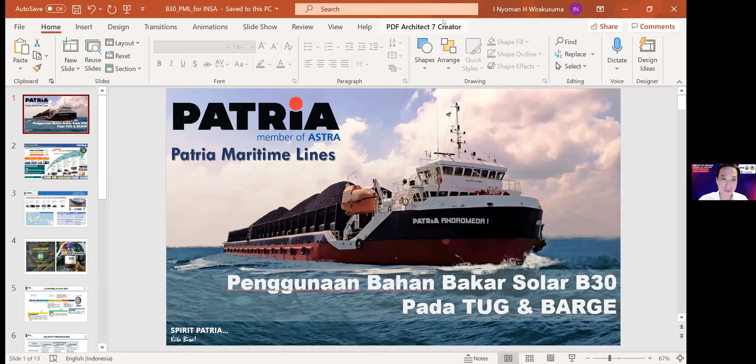Sebentar Pak, aku belum mau next ya. Pak Ronald, Pak Roland. Yes, Pak. Sepertinya nge-jam nih, nggak bisa masuk nih, nggak bisa next. Bisa next ya. Oke. Ya. Mungkin tuh slide show-nya Pak, ditekan slide show mungkin Pak. Iya. Saya sudah tekan slide show-nya ini, tapi nggak mau juga nih. Oh gitu. Oke, coba dari saya ya. Ini ada materinya Pak. Ini. Pak Roland ada kan? Ada Pak. Ada. Wah, nggak mau sama sekali nih. Saya stop sharing dulu ya. Oke, boleh Pak. Mohon maaf, Bapak-Bapak. Menandakan kalau materi Pak Nyoman ini padat banget Pak. Sampai ngehang ini. Oke.

Sekilas sebelum masuk ke presentasi inti, saya memperkenalkan diri di perusahaan kami bahwa Patria Maritime Line itu ada di bawah naungan PT United Tractors Pandu Engineering dengan brand Patria. Kita ada anak perusahaan PT United Tractors di bawah naungan Astra. Patria, PT United Tractors Pandu Engineering itu mempunyai 4 anak perusahaan: Patria Maritime Line, kemudian Patria Maritime Industri itu docking ada di Banjarmasin, Patria Maritime Perkasa itu shipyard ada di Batam, dan juga ada sedikit perusahaan yang agak melenceng, ikan ya, Patria Perikanan Lestari Indonesia.

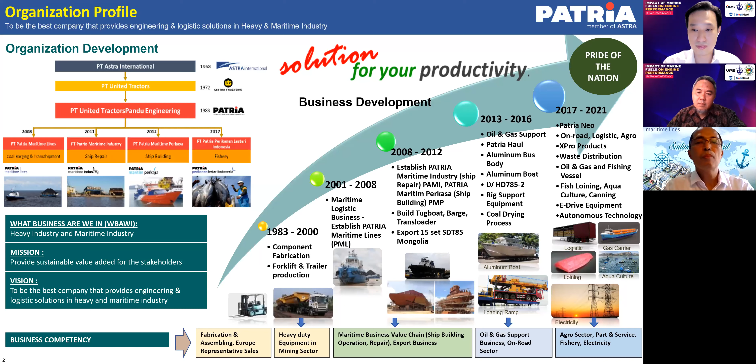Untuk Patria Maritime Line sendiri, kita termasuk perusahaan yang baru, baru berdiri tahun 2008. Kemudian kita mostly di Tug and Barge. Kita coba juga mengoperasikan invest floating crane, kita punya 1 set, dan juga Tug and Barge, SPB ada 1 set. Jadi kalau engine-nya kita menggunakan Yanmar, baik itu 300 feet maupun 320 feet, dan mostly ini beroperasi di Kalimantan Selatan, khususnya di Sungai Barito, dan ada mungkin ya begitu banyak ke Inter Island. Jadi kita kebanyakan di sungai untuk mengangkut batu bara dari Kalimantan Tengah menuju ke Tabunio. Next.

Oke, kita mulai masuk ke pemakaian bahan bakar B30 di Tug and Barge kami. Lanjut.

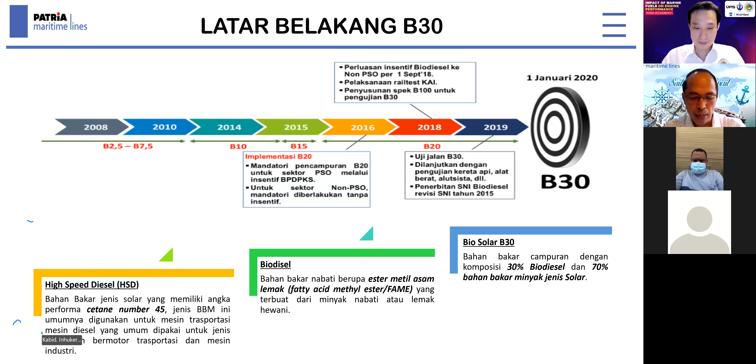Sebelum kita mulai, kita coba lihat dulu latar belakang pemakaian B30, di mana dari tahun 2008 ada Permen ESDM Nomor 32 tahun 2008, itu mulai penggunaan biodiesel dengan campuran 2,5 sampai 7,5%, itu 2008 sampai 2010. Kemudian di 2014 naik ke 10%, kemudian 2015 permennya diganti dengan Permen Nomor 12 tahun 2015, sama tentang pemanfaatan dan tata niaga bahan bakar nabati, di mana persentase daripada FAME dari CPO ditingkatkan dari 15% ke 20% dan akan lanjut sampai ke 30% mulai tahun 2020. Next.

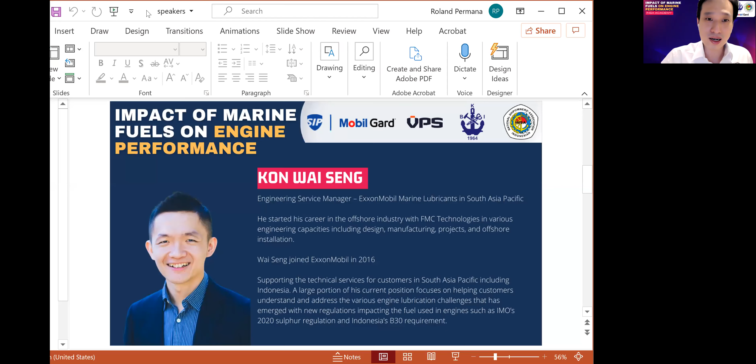Okay, Mr. Wai Seng, are you ready? Yep. Let me share my screen. Okay. Can you see my screen? Yeah, it's clear.

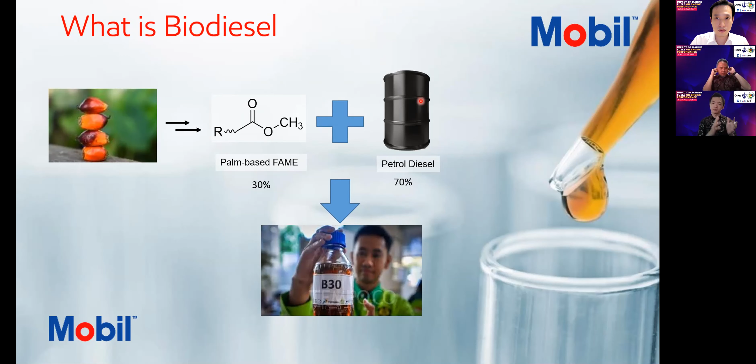But there are challenges when you're using biodiesel, because when it is exposed to things like air, water, and heat, the FAME content, fatty acid methyl ester, breaks down to form acids, ketones, and other components. This leads to a lot of the issues the earlier presenters talked about as well: storage stability, corrosion, sludge, filter plugging, and so on. So now let me talk about some of the other issues that can come from this.

Now, fuel dilution is caused by excess unburned fuel mixing with the engine oil in the crankcase. Fuel dilution cannot be avoided. In every engine, there's going to be some amount of fuel dilution because it's not possible to have a perfect seal. So even if you're using pure diesel fuel, you will have some fuel dilution. Now the key is you want to minimize having too much fuel in the engine oil, because it's not good, as we all know.

Here you can see a list of all the possible issues if you're diluting your engine oil. You have reduction in viscosity. You will also dilute away the additives in your oil. So let's say in my oil I have 100 of this additive. If I put 1% fuel, 2% fuel, I will dilute away this additive, and it will progressively become less and less. So my engine oil can no longer do the job it was meant to do because it is diluted away.

Then the FAME content also causes increased oxidation in the lubricant, and because of the viscosity differences, it also washes away the lubricant film between the liner and the piston. So when you combine all this, it actually increases the wear in the engine. If you look on the right side over here, excessive fuel dilution can be caused by a few things. For example, if your fuel injector is not working properly, you end up with very poor combustion, and the fuel will just flow into the crankcase.

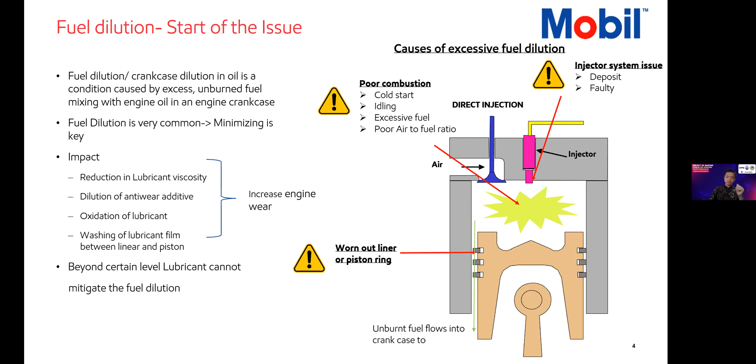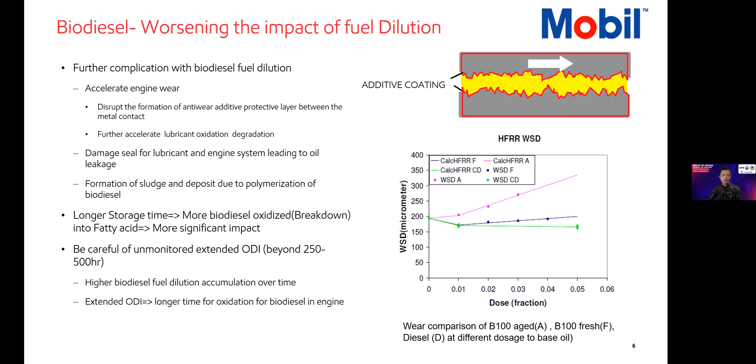Okay. So now let me move on. So some of the symptoms of B30 use: you can check, is your engine having any smoke? The smoke means there's some incomplete combustion. You can check the oil viscosity in your crankcase. If the viscosity is going down, that means it's being diluted by some kind of fuel. Accelerated oil degradation: this one, you really need a used oil analysis to pick up whether there's any oxidation happening.

Formation of deposits: this one is really down to inspecting your engine during the overhaul to see if there's any additional buildup of deposits, or whether you need to change out your injectors, or some other maintenance steps you need to do. Increased corrosion and wear: this one you can partly pick up during inspection or through used oil analysis, whether the iron levels are picking up, or anything like that. Okay.

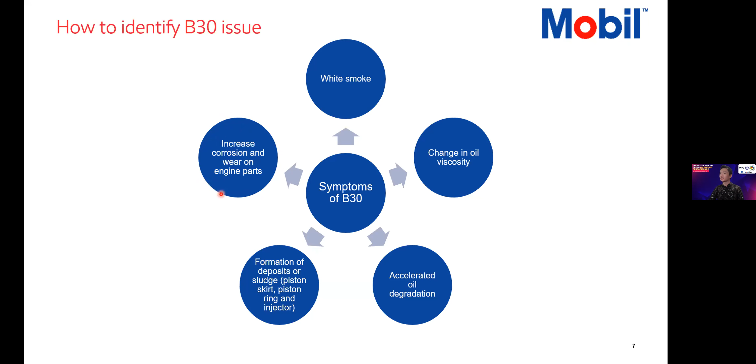Next one is avoid exposing your biodiesel to significant oxidation. As best as possible, keep the fuel and the oil sump sealed, and avoid exposure to light. And do not store the biodiesel blend for too long. I think the earlier presenters also said not longer than 3 months, and I think that's a good guide, because the biodiesel can retain water and can lead to microbial growth.

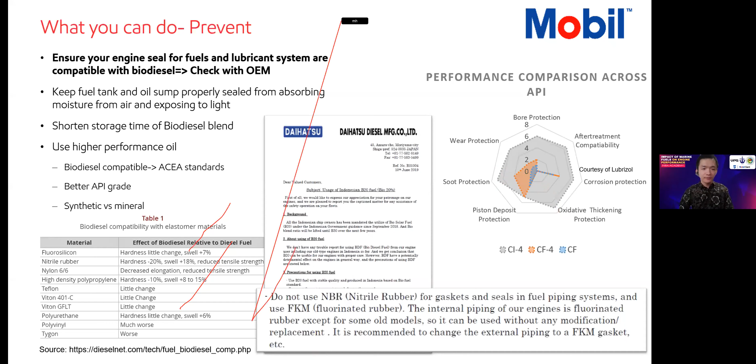Conduct regular inspection. Check the fuel injectors for deposits, engine wear, and all the other good stuff. And of course, reach out to your OEM and oil supplier for guidance if you have any issues. Okay.

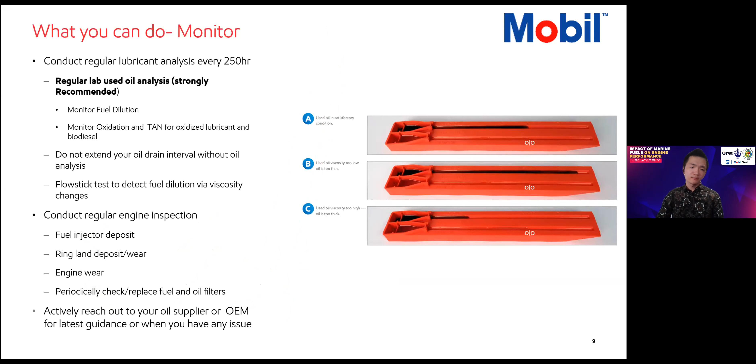Yeah, I mean, I will share at least what ExxonMobil has done. So for us, we have the Mobilgard HSD grade meant for high-speed engines. Earlier I said you cannot just keep diluting with fuel and expect the lubricant to do its job. But at the very least, what we've done with the Mobilgard HSD is that we've tested it with this European standard, CEC L-109-14.

But what we've done is we modified the test. The European standard makes you test it with soybean and rapeseed. We modified the test to test our product with palm oil B100 up to 7% to make sure it still meets the limit of this European standard in terms of viscosity change, oxidation, and so on. So, and it passed the test.

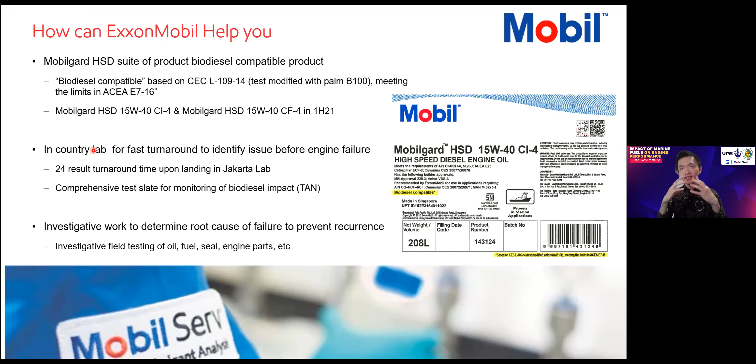So we're very happy that the product we have for the marine sector is fit for biodiesel use. We've also launched a lab in Indonesia, because a lot of the issues I mentioned, you can detect with oil analysis, and it's one of the steps. You need to do an oil analysis to make sure you pick up the issues before they happen. And if there's any investigative work, try to get to the bottom of it - do you need to change your injectors, do you need to change your seals, and solve that.

So I think coming to the summary, biodiesel can lead to a lot of unavoidable issues, but with biodiesel use, it's worse than with pure diesel use. So there are preventive steps you can use, and you just need to do constant monitoring, do your used oil analysis. And if you have any issues, happy to help and support in this case, reaching out to us or our distributors who work very closely with us. Okay, thank you everyone, that's all I have for today.

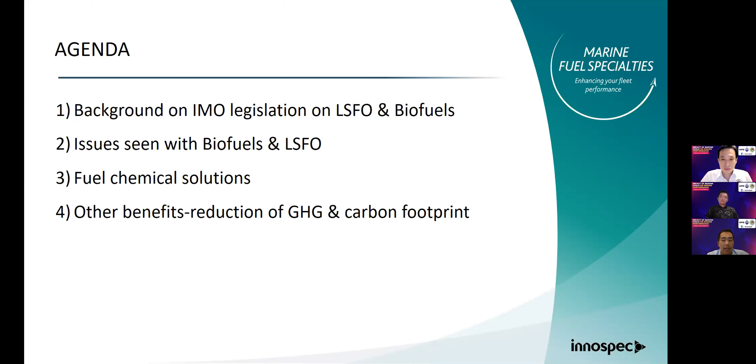I did recall that some of you mentioned that biofuel has a lower energy level - you will probably see a higher fuel consumption. And today everybody is looking at greenhouse gas reduction, carbon footprint. Maybe fuel treatment chemical is also one solution.

I believe all of you know that globally under IMO, vessels operating outside Indonesian waters need to comply with the legislation from 2020. Anywhere around the world, outside Indonesian waters, you need to consume fuel with less than 0.5% sulfur.

And if you are operating in areas like ECA, emission control areas, from 2015 the limit is actually 0.1.

Okay, my phone has not been ringing the whole day. This is the first time.

I'm sorry about that. If you look at this emission control area map, the areas highlighted in dark blue are the emission control areas, 200 nautical miles off the USA and Europe. These are the areas where you need to use 0.1 sulfur content and below.

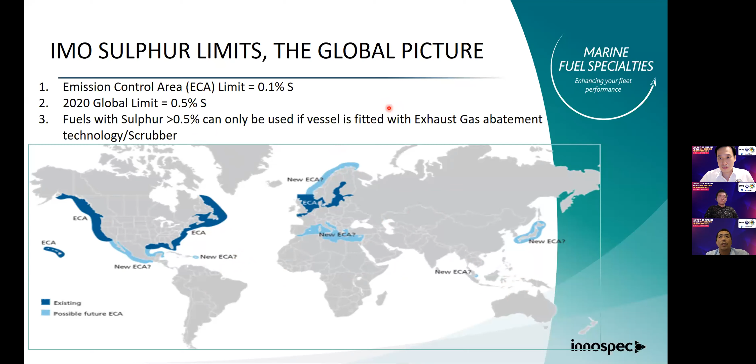The rest of the areas are actually 0.5, except Indonesia, which has local legislation to use biofuel. The only time you can use a fuel with more than 0.5% sulfur is when the ship is fitted with exhaust gas abatement technology, or scrubber for short.

Okay, I'm going to talk about biofuels. I'm sure all of you already know the government has mandated B30 for local shipping. Again, this relates to IMO. Usage of biofuel today is mainly on trials.

Why is it so? Because there's also a study showing biofuel can actually cause an increase in NOx.

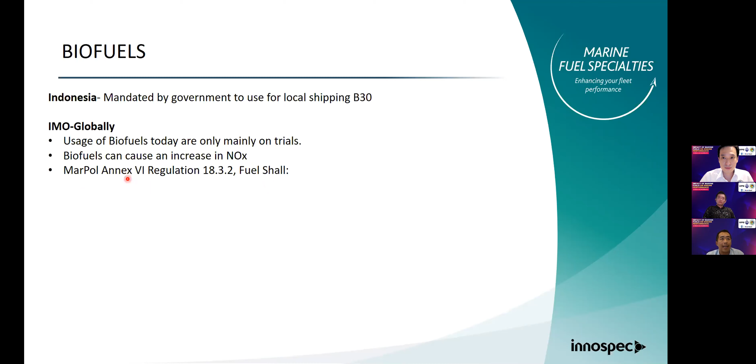Today, MARPOL Annex 6 regulation, with regards to emissions, regulation 18.3.2 states that fuels shall be blends of hydrocarbons, free from inorganic acids, chemical waste, and should not jeopardize the safety of the ship.

One of the reasons is because during the trial of the ship, when doing the MARPOL Annex 6 NOx certification, the ship was actually tested using hydrocarbon fuel, not biofuel.

So vessels must apply for an exemption certificate for trial purposes only from the flag state under MARPOL Annex 6 Regulation 3.2. Today, all ships around the world using biofuel need to go to the flag state for this exemption, and it's only allowed for a certain period, unlike in Indonesia.

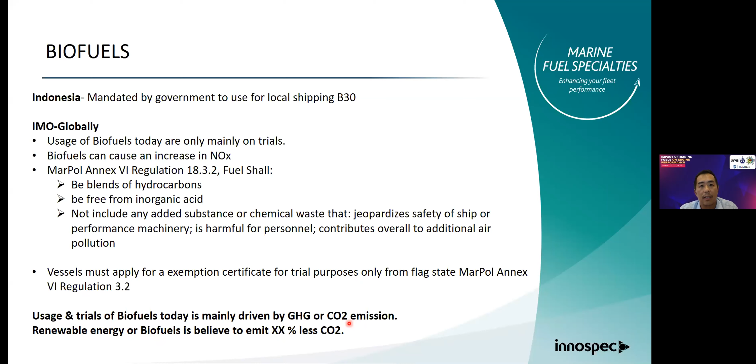Usage and trials of biofuel today are mainly driven by greenhouse gas emission or CO2 emission concerns, because biofuel is considered renewable energy and is believed to emit a lower percentage of CO2, which is good. I think this is the direction the industry is going, and maybe Indonesia is leading it.

You also have Oldendorff, and BHP, one of the biggest commodity exporters, working with the German company Oldendorff - they are also doing trials. And then of course you have Hoegh Autoliners also doing a trial. All of them are basically doing trials.

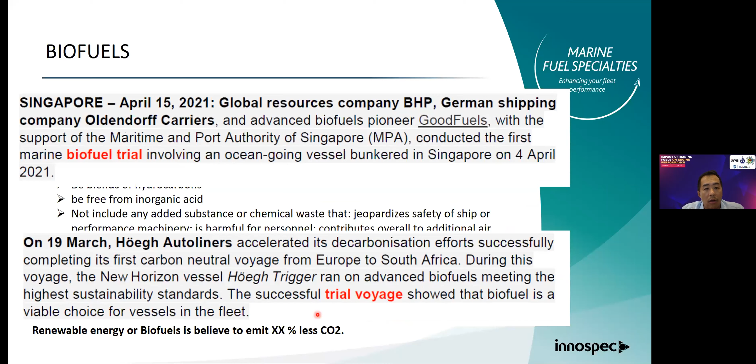So what are the issues that we have seen? I think the previous presenters have also shared their experience operating biofuel, and I think they're all spot on. There are a few issues.

Maybe it could be due to bad blends, or prolonged storage - I think everyone mentioned you should not store it too long. Again, how long is long? And for that you also need to consider the condition in which the fuel is stored.

Oxidation - I think everybody also mentioned oxidation. Oxidation is a process where the fuel absorbs oxygen from the atmosphere, and this process accelerates when the fuel is stored at a higher temperature.

So depending on conditions, in Indonesia it's probably not so bad - you don't really need to heat the fuel. However, you are still exposed to atmospheric temperature, depending on where you store it. I'll touch on that as well.

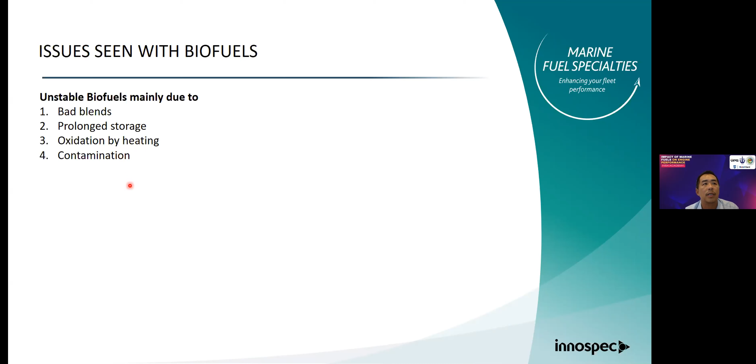Contamination is very important. Contamination with what? It can be with seawater, with fresh water, or with bacteria. I will also touch on that.

Naturally, I think all of us know that biofuel comes from a vegetable or renewable source - for example, soya, palm, which is mainly produced in Indonesia, grapeseed, and wheat.

All of this is actually fatty acid methyl ester, which in Indonesia you call FAME. So this is how it looks like. So what is the problem with this vegetable biofuel?

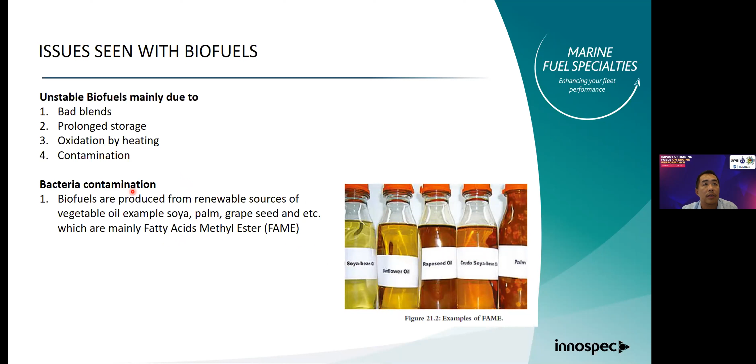But what is the main problem with this? In shipping, clogging of filters is actually very critical - it's like our heart, where you have no blood flowing. When you have clogging of filters like this, it can lead to starvation of fuel to the engine, and then of course your engine will stop.

I hope you will not become like the big Evergreen ship that was stuck in the Suez Canal. Okay, those things are mainly for stability - I will not touch on that because if I do, I don't think I'll have enough time. Please feel free to come back to us if you have any questions on that.

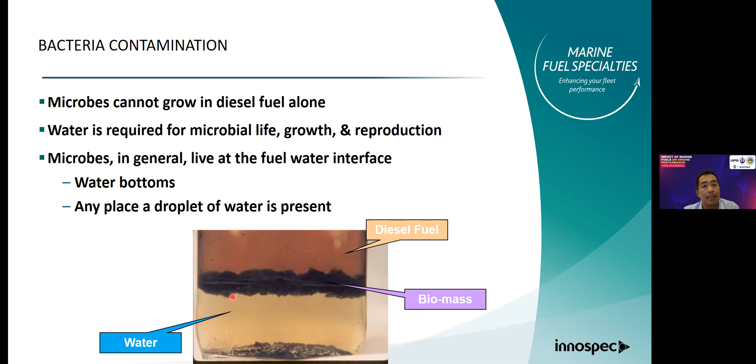What you need to do is flush it completely. You need to kill the bacteria before you replenish, otherwise the bacteria will come back. This is some of the bacteria that is at the bottom of the tank.

So how do you distinguish that you have this problem? I think it's quite easy - if you open up the tank and smell anything like bacteria or something rotting, straight away you know this is bacteria. Otherwise, it is just purely due to a stability issue.

Okay, this is the filter blocking tendency - I think someone asked me to include this.

Okay, this is something that we have done to make sure that the fuel is stable. This product is also tested on B100. What is B100? I'm sure you know this is 100% biofuel. Of course, for 100% biofuel, the treat rate for this product to be effective is much higher.

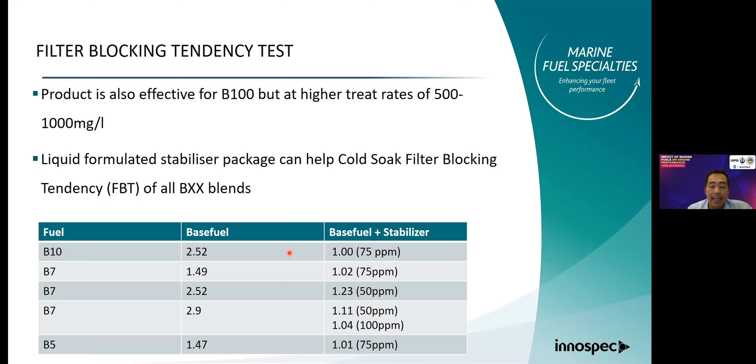Okay, best practice for biofuel. This is from many years of experience. I think it's quite straightforward because biofuel has been used, not in the marine industry, but in land applications for a long time. Okay, avoid prolonged storage. I think many of us did mention that it's actually 90 days, but I would say it's around 30 days. Of course, it also depends on the condition, how it is being stored.

The best practice is, I would say, first in, first out, meaning to say, if you have a few bunker tanks, you need to make sure that the older bunker tanks are consumed first. Of course, it's easy to say 30 days. I know in ship operation, sometimes it's not even possible, not even 30 days, not even 90 days.

So when you store the biofuel, you need to make sure that it is not heated. In your case, you don't need heating, but you need to also see that the adjacent compartment is not heated. For some ships it is very critical because they are carrying some other fuel that requires heating. So if you're heating the other compartment, the heat is transferred to the tank with biofuel. Heating accelerates the oxidation issue, so we try not to do that.

Okay, good housekeeping. What do we mean by good housekeeping? You need to minimize the water contamination. You need to drain the water as far as possible. In the past, we didn't really drain diesel tanks. Those of you that have been on bigger ships, we drain a lot of heavy fuel tanks. We don't drain diesel tanks because we think that there's no water there. But in our condition, there's actually a lot of condensation. What you need to do is minimize the water.

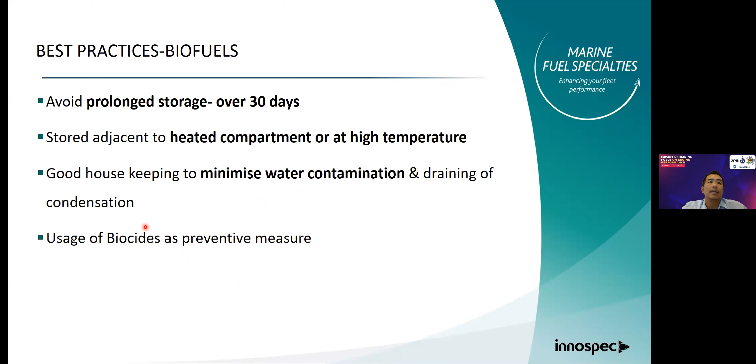If you can't do all this, then there's one more thing you can do: you can actually use biocide to prevent all this happening. This is, I would say, the last measure. If you think that you're going to store it for too long, you can use a stabilizer and a biocide to kill the bacteria.

Okay, now I'm going to touch a little bit on IMO compliant fuel. This is only a few slides, probably a good thing for you to know, because you're not the only one suffering from biofuel; all these people are having even more problems. IMO 2020 fuel, VLSFO, the biggest problem is unstable fuel. Unstable fuel can be due to 3 issues.

Asphaltene is unstable. Again, asphaltene is the black stuff that clogs the filter. The second thing is oxidation of distillates. Oxidation is something that doesn't go away in fuel. Same as your biofuel, all kinds of fuel go through this process of oxidation. So when you have oxidation instability, you again have clogging of filters. And then you also have waxing. Today, VLSFO is even worse. It is very similar to what you saw on your filters, but this is waxing.

This is due to low temperature. So here, waxing, you need to manage it by heating it again. But when you heat it, you have this number 2 problem.

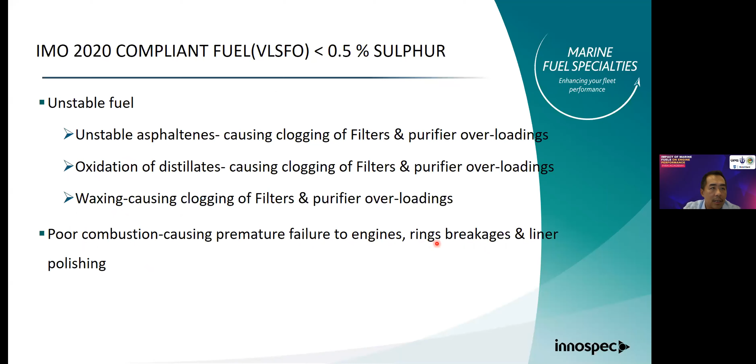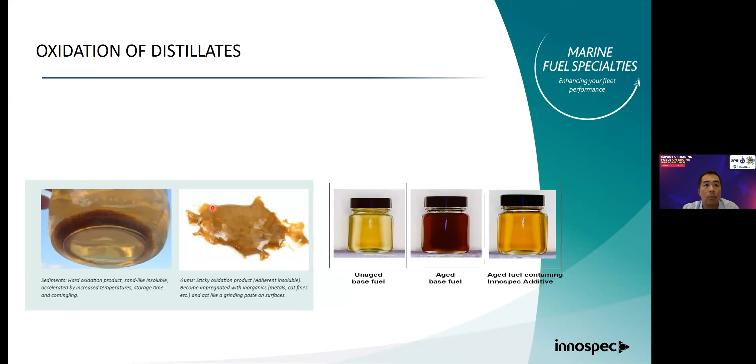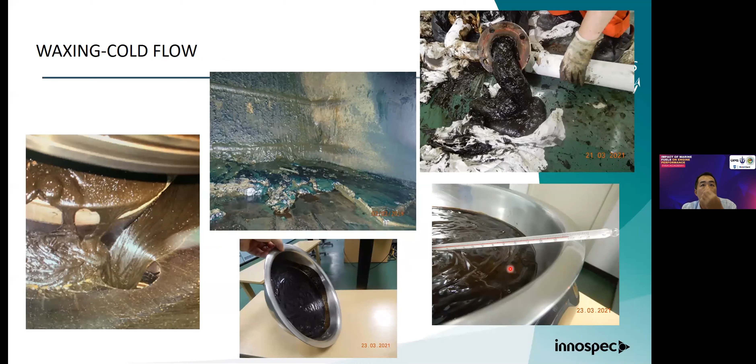So if you don't use any treatment, what you can do is only eliminate the possible problems. This is very interesting. This is wax. You can see from the appearance, it looks much like grease. It clogs the pipes. You can see that the fuel refuses to flow until a very high temperature, 95, before it starts flowing. This is crazy.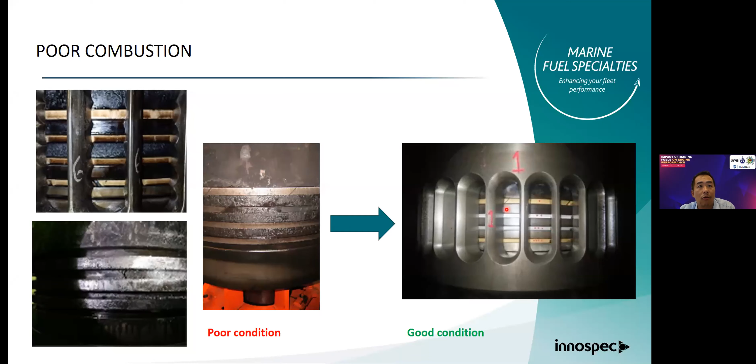Of course, the other problem that we have on the bigger engines is poor combustion. You can see that all the piston rings are getting carbon deposit. It should look something like this. So good thing that when you're using biofuel, I hope you're not seeing this. Okay, this is something that we do, how we want to improve combustion.

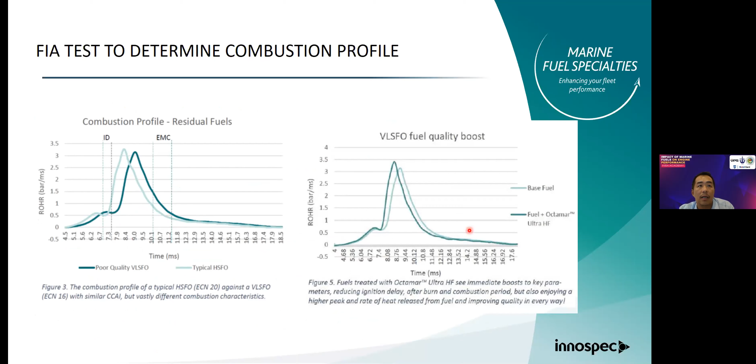So we see a lot of ignition delay, and what we do is try to bring the ignition delay back into good combustion with a product. When you have ignition delay, you have something called afterburning. Afterburning is what is causing all the problems as well.

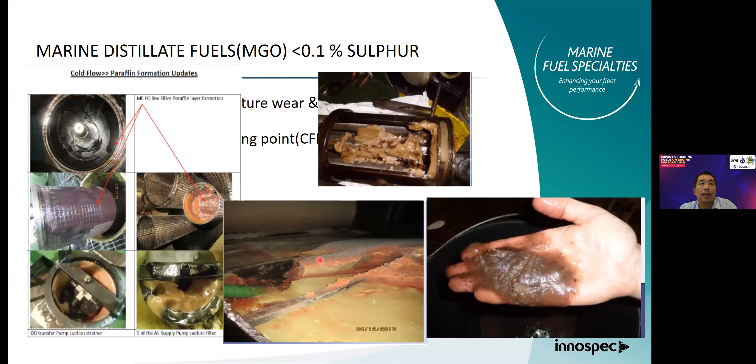What is the other problem? Again, very similar. All the fuel problems look quite similar. All of them turning to become like grease. So this is actually cold flow, CFPP. This is all due to waxing at low temperature. Okay, lubricity specification is not something new.

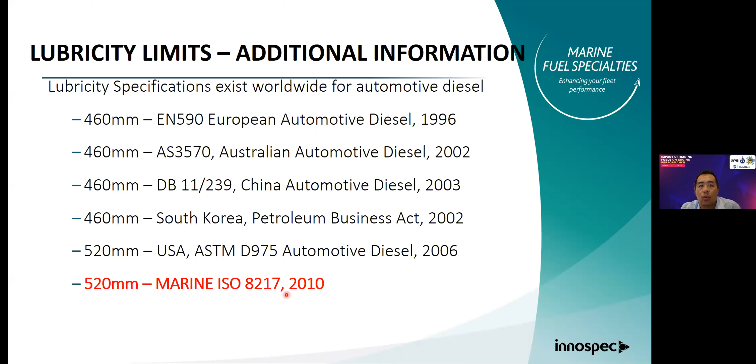This is something that has been in automotive diesel for a long time. When did the marine industry adopt this? I think we adopted this in ISO 8217:2010. Yeah, it's a long time ago. So this is what we do.

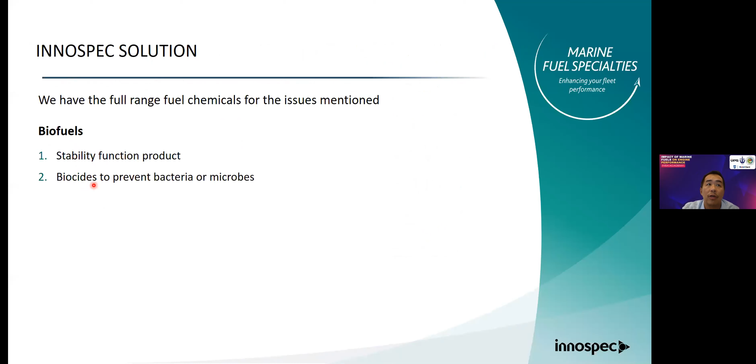So, a solution. We have a full range of fuel treatments that is actually able to solve this problem. Of course, when you talk about biofuel, like what I mentioned earlier, you need something to stabilize the fuel. If you're storing it for a while more, this is very important. Biocide is also very important to prevent bacterial growth and to kill all the bacteria. If you're on VLSFO, again, stability function. And then if you have combustion issues, you talk about combustion improvement.

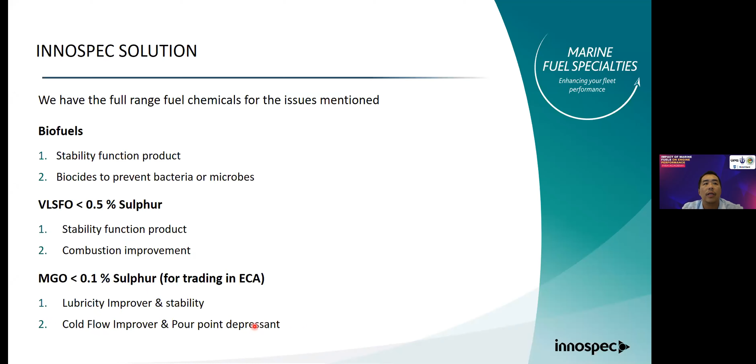And then when you talk about marine gas oil, you talk about lubricity. And of course, if you're operating in very cold climates, not in Indonesia for sure, you don't need this, it is cold flow improver and pour point depressant to bring down your pour point.

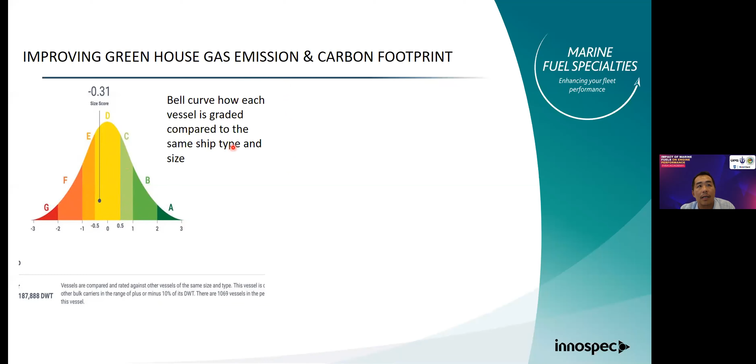This bell curve is actually for the same ship type. It is graded based on the same ship type and similar size. So there are many things that you can do to bring your ship towards the right direction. The last thing you want is, of course, a new ship. That's the reason why IMO is talking about 2040 and 2050 to achieve the target, because we cannot expect everyone to build new ships.

So there are many things that you can do. You can have a propeller duct, propeller boss caps, rudder modifications, waste heat recovery, engine power limitation, propeller. We are working with some of the authorities that can verify that fuel treatment chemicals can actually be part of the initiatives that will help you reduce your emissions.

How much can fuel treatment chemicals help? If you follow us on our website, we have done some of the tests in Europe and China in trains and automotive. I would say the rule of thumb is probably about 3%. 3% is something that fuel treatment chemicals can achieve to reduce your greenhouse emissions.

So by improving your vessel's SFOC, your specific fuel oil consumption, that will help you to reduce your GHG, and that will improve your grams of CO2 per ton mile. That is the measurement that the industry is using: the ton that you carry, the mile that you travel, and the less CO2 that you emit. I think that is my last slide.

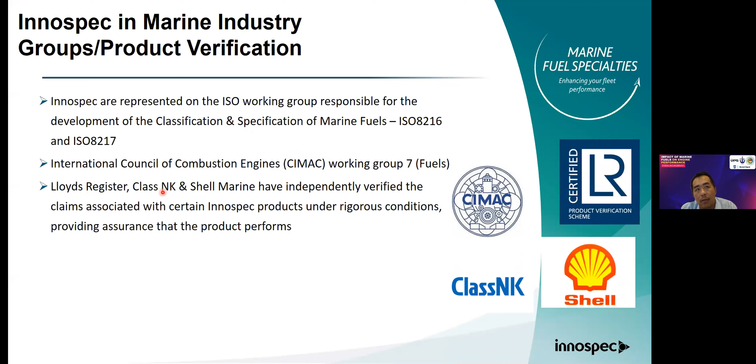We are also part of the International Council on Combustion Engines, CIMAC Working Group 7. Some of our products, like I mentioned, are verified by classification societies like Lloyd's Register, Class NK, and we work independently even with Shell Marine. We are also represented in the Singapore Shipping Association, which is the Marine Fuel Committee, the largest bunkering port in the world.

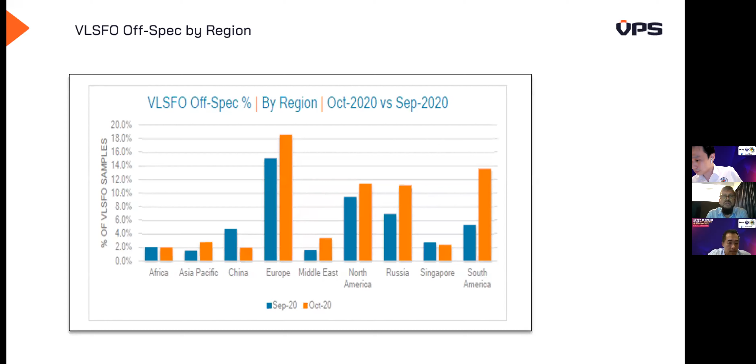Okay, so VLSFO, just to give you some comparison between last year and the last two months, a trend that off-spec cases are increasing, and this trend is actually continuing. That means we see more and more off-spec cases in almost every region.

Wax appearance temperature. As you know, the VLSFO are thick black, so you cannot do a cloud point test on the VLSFO. You can only do the wax appearance temperature. And I think before me, Martin has already shared the wax appearance temperature. Yeah, he has also shared with you a lot of ugly pictures. And no need to be so disheartened, but you need to manage it, you need to test it, you need to know what is the wax appearance temperature, and you need to maintain the temperature to avoid the wax formation.

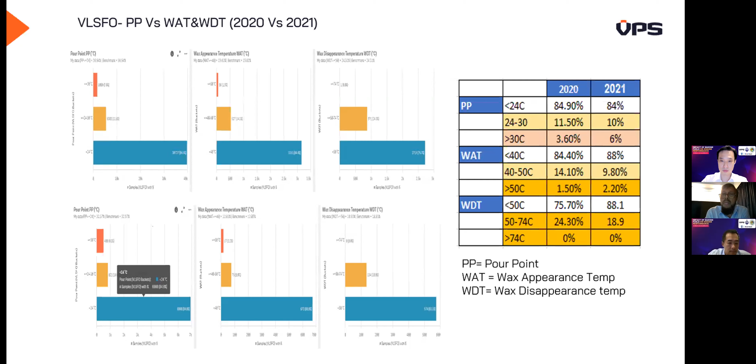Sediment. The sediment is what you actually measure to see whether the fuel is clean or dirty. So if a fuel is clean during bunkering and your sediment value is low, you can still have that fuel become dirty in the storage tank, because of something called stability of the fuel. The stability allows the asphaltene to be evenly distributed in the fuel, but for some reason that balance can be disturbed. Meaning if you keep the fuel in the tank, due to mixing, due to heating, or due to some unknown reason, your fuel can break down.

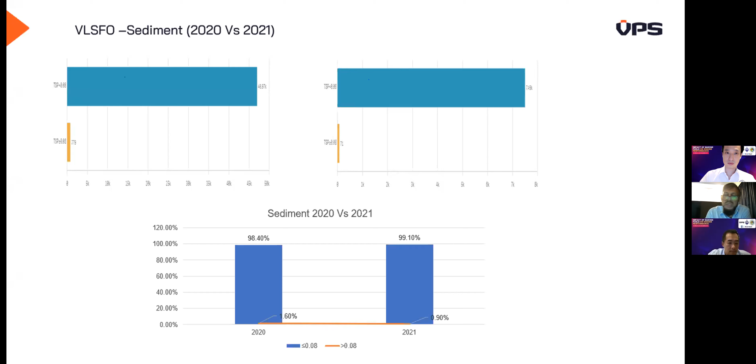I mean, if your filter is badly choked in the middle of the sea, your engine can just starve for fuel and the engine can fail. And if your engine fails in bad weather, you can have a serious disaster. The loss of propulsion can very much compromise the safety of the crew and the environment. So imagine, just yesterday there was one ship, unfortunately a Singapore owner, burning in bad weather off the coast of Sri Lanka. So these are all very serious issues. The main propulsion must be fit and always in good condition with no serious issues.

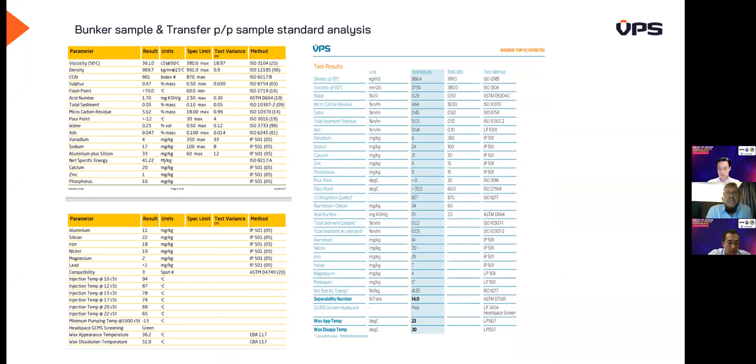So this particular ship had bunkered in Europe, and they already tested the fuel. The standard analysis did not show anything very serious, except the separability number was very high, but the sediment value was low. So at that time the fuel was still intact. Then later on, they gave us a sample from the transfer pump, also found not so bad. So then we did some chemical analysis on this fuel. If you look at the left side, the analysis results on the concentration of those chemicals are very unusually high. So basically this fuel was contaminated with chemicals.

If you look at the chemicals, you have phenol, you have alkene compounds, you have styrene compounds, and these compounds were at very high levels. And finally the vessel used the fuel, but used it little by little with a good fuel, and it took them months to actually get rid of this fuel. And they had a serious issue. They had to go to the nearest port and bunker good fuel to continue with their voyage. So they had a delay as well.

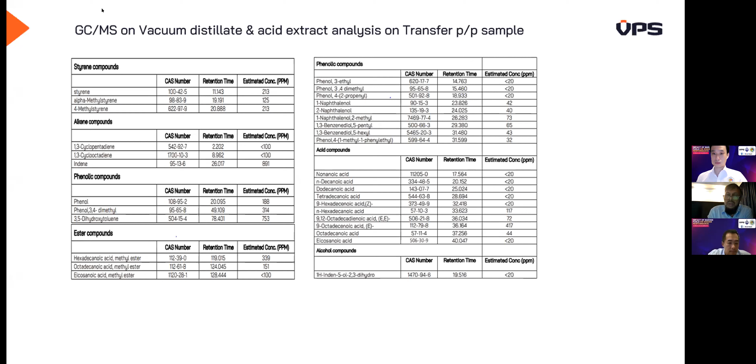The combustion chamber is there to have good combustion so that your lubrication is well performed. You have no abrasive wear, but if any of this is not correct, you will have issues.

Like Tahun mentioned, fuel dilution, then there was a discussion of ignition and combustion properties. No matter how good the fuel is outside the combustion chamber, if it doesn't behave well inside, you will have bad combustion and all the issues later on. So basically your combustion should be perfect, and that's how your engine is powered.

If you don't have good combustion, your fuel consumption will increase, you will have fuel dilution, your lube oil will be contaminated, your piston ring will break, your liner will need replacement, and then the cylinder lubrication - you have under lubrication, over lubrication, of course.

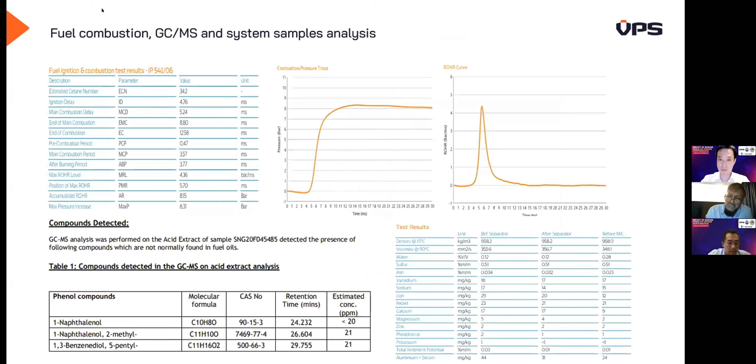These are all another area of discussion, but just to share with you, in this case we have done a series of tests. We did the ignition combustion analysis, we did chemical analysis, we did a standard analysis, trying to understand what is the issue.

Interestingly, this vessel also reported very high iron content and BN content, because these are all two-stroke engines with cylinder oil separate lubrication function. So if you have a very high iron content in your scrape down, that is a sign something is not right in your combustion chamber.

If you don't correct this immediately, you can have damage, and that damage can sometimes be irreversible. That means your piston ring has worn out so badly, or your liner graphite structure was damaged, meaning it was supposed to be an open structure, but now the structure is closed.

Then you may need honing, you may need liner replacement. It is a big damage. The damage can cost you huge money.

Very recently, a lot of customers are facing these issues, meaning they are using low sulfur fuel, but unfortunately there are a lot of cases going on. It is definitely not only a fuel oil issue, it is also a lubrication issue, and a lot of cases are at the moment under investigation.

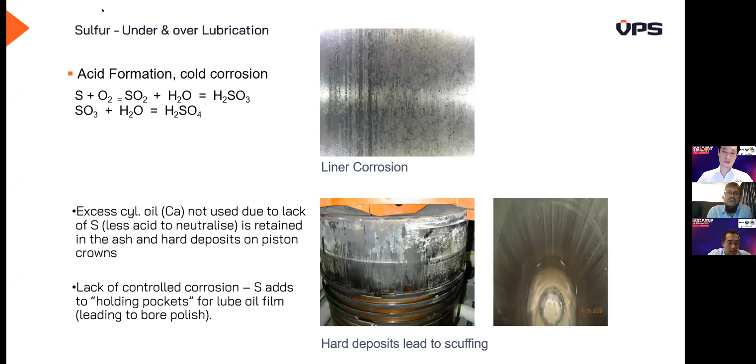As I mentioned, the graphite structure of the liner is very important. That means the liner surface should have small open pockets for the cylinder lubrication to form a film.

But for some reason, due to bad combustion or over lubrication - or poor maintenance - scuffing and blow-by can start. This blow-by will start the abrasive wear, meaning the ring and the liner will start rubbing each other.

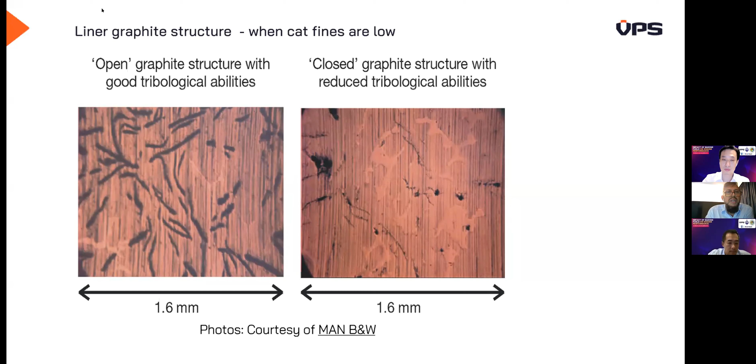There will be heavy deposit forming on the piston crown, and it can increase the wear. Then you will have scuffing, and this scuffing can turn into a big blow-by, and it can end up causing a crankcase explosion. So these are all serious damage.

As I mentioned about ignition combustion quality, we are studying this. Just to share a little bit with you, we have been observing the ignition and combustion characteristics of VLSFO, and it appears they have a much shorter ignition delay in the combustion chamber compared to HSFO.

So we are still studying - is this too quick ignition a contributory cause, disturbing the formation of oil film and not coinciding with the good combustion cycle? It's definitely not a conclusion, because we are just studying it, and we see many vessels where even when one vessel has a problem, another vessel did not. So it could be a contributory factor together with engine age, engine maintenance, and a lot of other issues. But we are currently studying this to see if it is a contributory cause.

Just to summarize on fuel management, the tips are: you need to actually buy good fuel, you need to test it, and you need to test beyond what is your standard testing.

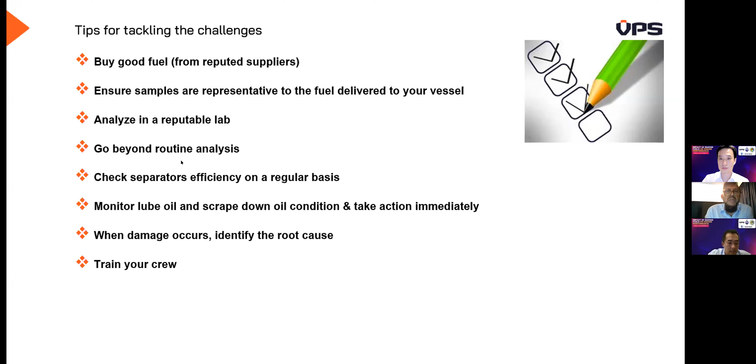You need to regularly check your system to see if your purifier is working, because if it's not, that can be the trigger point of all the problems. Definitely you need to keep monitoring your lube oil analysis and scrape down analysis. And when you have a problem, you need to go deep into it and find out why it happened. If you just do damage control and repair it without addressing the root cause, it can pop up on the same vessel or another vessel at another time. So you need to find the root cause.

I just want to share a little bit on biofuel. As Martin has shown a lot of trial runs going on with biofuels, I want to share that we are actually one of the parties in many trial runs going on. So far, since it is a renewable oil, we see that it has a future.

It's not only biodiesel, I'm also talking about biofuel in general. So please contact us if you need any trial run or information on biofuel. Currently many clients are with us doing trials. I won't go into the issues of biofuel since that's already been covered by Tahun, Martin, and other speakers. I just want to give you the good side - trial runs are going on and so far a few clients have already used it without any issue. But we're monitoring them, since some are now lifting the second parcel, so we'll see what happens. We'll probably learn from that and be able to share more with you in future. Thank you very much for giving me the time.